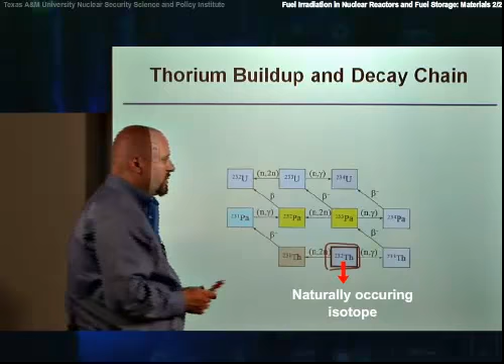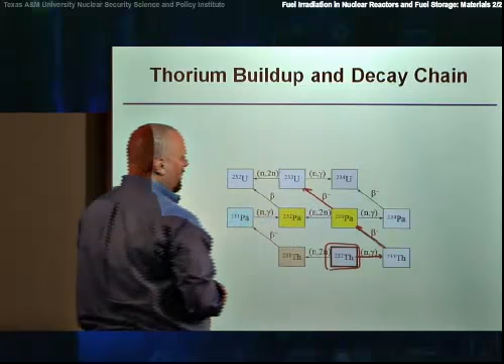There's also another buildup and decay chain that exists for reactors, which is the thorium chain. Thorium can be dug up out of the ground. It exists naturally. There's only one naturally occurring isotope of thorium, thorium-232. Thorium-232, when it absorbs a neutron, will produce thorium-233. Thorium-233 then goes through a beta decay to protactinium-233, which then beta decays again to uranium-233. And uranium-233 is a good nuclear fuel, like U-235. So when that exists in a reactor, it'll predominantly fission in the reactor and produce power.

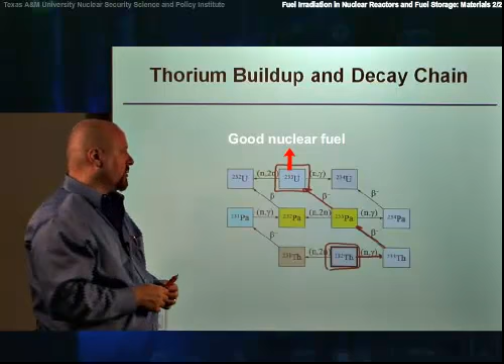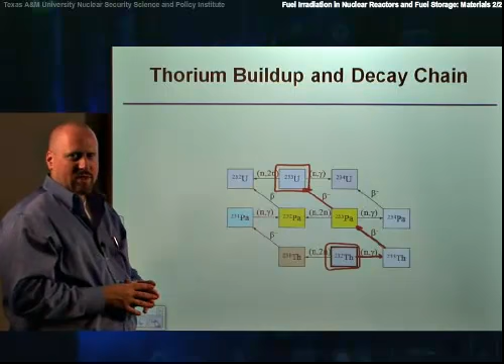This particular buildup and decay chain really only occurs in India. It'll occur in any reactor that you put thorium into, but the only country that really uses this cycle is India, where they have a large amount of thorium in their soil and a small fraction of uranium compared to some other countries. Most other countries really haven't explored this particular fuel cycle in much detail.

The other thing that gets produced, as those fission reactions occur, are fission products. And those fission products will also go through buildup and decay chains. Principally when uranium-235, plutonium-239, or U-233 fissions, they produce fission products that are very radioactive with very short half-lives. For instance, tellurium-135, which has a very short half-life. That isotope then will decay to I-135, which then decays to xenon-135, that decays to cesium-135, that decays to barium-135. So as you can see, it's decaying through a mass chain. In all cases, the isotopes all have the mass 135.

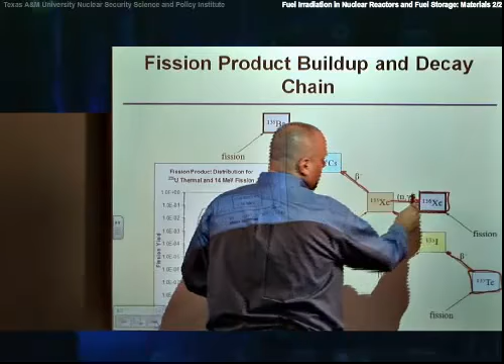In some cases, those isotopes might absorb a neutron. For instance, xenon-135 can absorb a neutron and make xenon-136, and xenon-136 is then stable. Xenon-136 also could be produced directly from fission. And so as you irradiate a fuel, you'll produce these radioactive isotopes. These radioactive fission product isotopes actually dominate the radioactivity of the fuel when it's first discharged from a reactor.

The distribution of these isotopes you get is somewhat odd. As a function of mass chain, you get what they call the characteristic double hump curve, a very non-uniform distribution where principally most of the fission products produced have masses around 90 AMU or 140 AMU. There's a deficit, a valley in the middle, as well as very few isotopes produced at the very high masses and very few at the very low masses. This curve shows that the actual distribution of fission product isotopes you'll expect to see in a reactor depends on the particular reactor design and how it's operated. So you'll get these different but predictable distributions of isotopes.

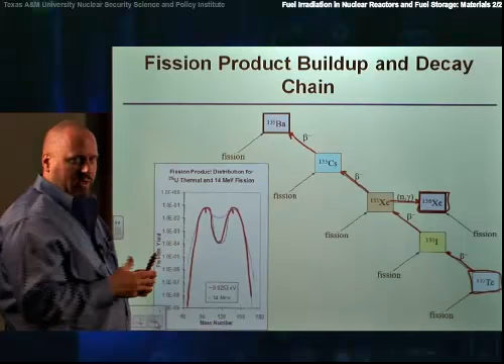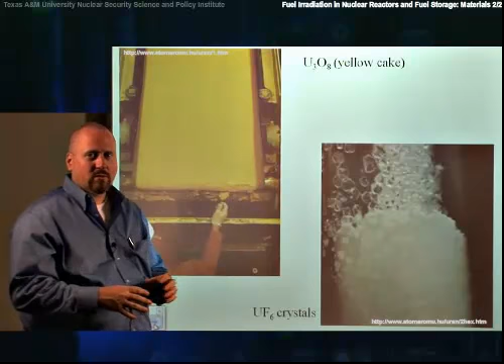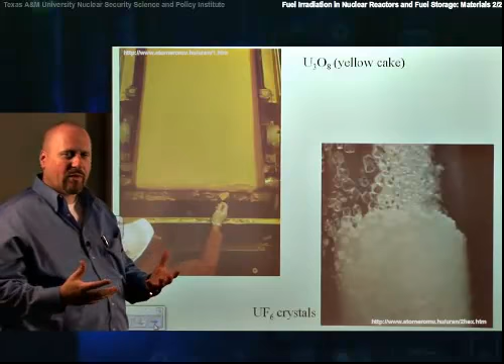These next couple of pictures just show some of the different chemical forms of materials we'll expect to see throughout the fuel cycle. The first one here shows U3O8. You might expect to see uranium ore, which is something we would dig up from the ground. There's no picture of uranium ore shown here because it's pretty much just dirt, so not very interesting. But that uranium ore will be milled to a concentrated product, which we call U3O8 or yellow cake. It's called yellow cake for a fairly obvious reason - it's a yellowish-orange color. Yellow cake itself is a solid, powdery form that is fairly non-dangerous. As you can see, this individual isn't wearing any special protective clothing. He's just wearing a couple of plastic gloves, mostly to keep the material from getting contaminated from him, not so much him from the material.

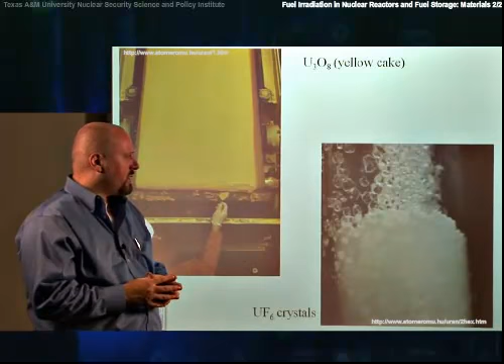Another form of uranium that we would expect to see is UF6, or uranium hexafluoride. Uranium hexafluoride is the only chemical compound of uranium that exists in gaseous form at fairly low temperatures. At room temperature, it actually exists as a solid crystal, and then at slightly above room temperature it turns into a gaseous form, and that gaseous form of uranium is then what is used in gaseous diffusion plants and gas centrifuge plants that you might have heard of.

That uranium hexafluoride, after enrichment, could get produced, turned into uranium dioxide, which is the principal form of uranium that we see as nuclear fuel in reactors. Uranium dioxide is a dark-colored ceramic. These particular pellets aren't to scale - they're blown up - but you'd expect them to have a diameter similar to the diameter of my pinky.

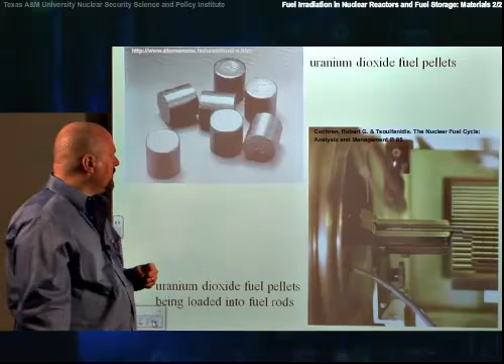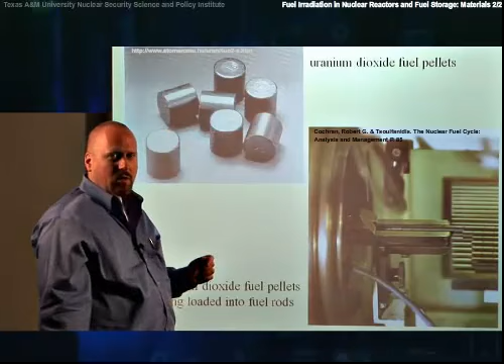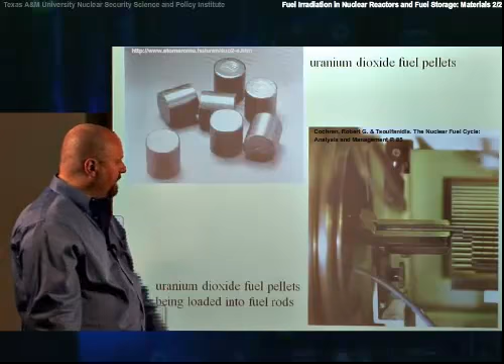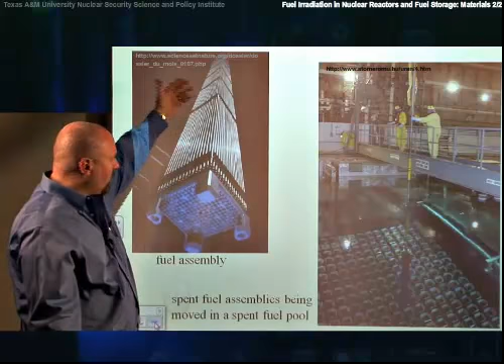Those uranium dioxide pellets then would get loaded into steel tubes or metal tubes. Those tubes are typically about 14 feet long, so they're very long, but again very skinny, about the diameter of my pinky. The typical tubes used in the United States are made of what they call zircaloy, which is a zirconium alloy. Those tubes then get welded together and loaded into a fuel assembly. This fuel assembly, which is a typical PWR fuel assembly, or pressurized water reactor fuel assembly, is about 14 feet long and about 8 inches on a side. That assembly weighs about a metric ton.

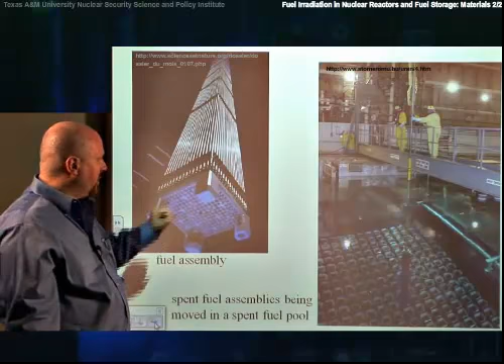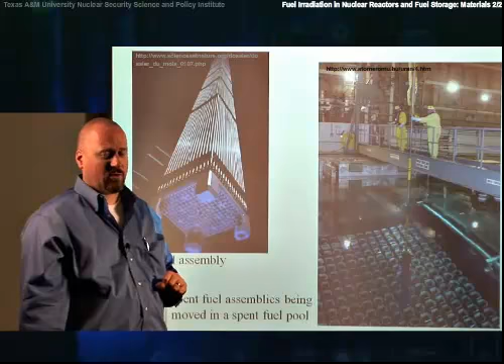That particular assembly then would get loaded into a reactor and irradiated. After that comes out of a reactor, you would have the irradiated fuel assembly. You may or may not be able to see in this picture, but that assembly is in fact glowing blue. That blue glow is what we call Cherenkov radiation - it's visible light produced from the irradiated materials when in water. Those irradiated materials always have this characteristic blue glow, which helps you know that the thing is in fact irradiated. This is a picture of a spent fuel assembly at the Comanche Peak reactor, which is a 2-unit nuclear power plant outside of Dallas, Texas.

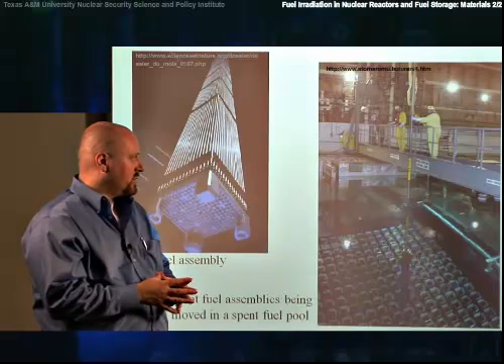All right, so that goes through some of the basic materials that we would expect to see in the nuclear fuel cycle.